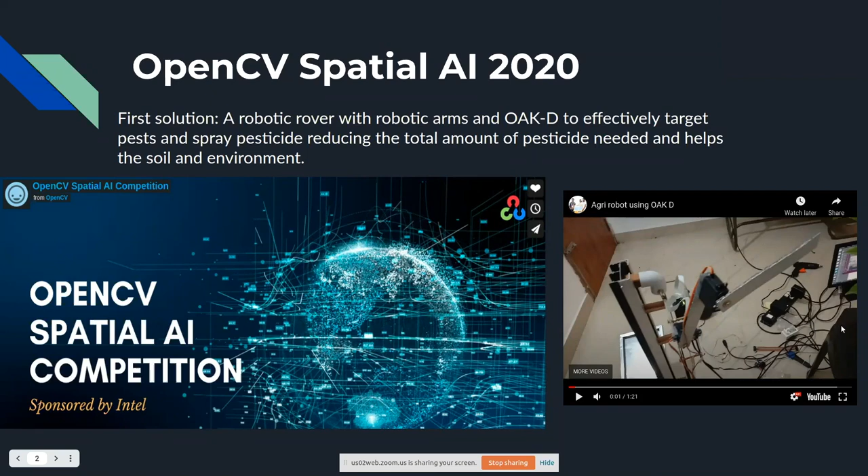You can say it's version 0.5, and it's basically a rover. That's the design part I've shown here, a simple proof of concept of what exactly we are trying to achieve. And moving to the next is what we are presenting here, moving from a rover to a quadruped. Big difference, it looks so cool now. Yeah, it's a huge difference.

You can see a lot of things happening there. There's a robotic arm, a small tank, and a small DC motor on the left side, and the OAK-D on the front side. So a huge difference is happening here. Just to give people some background, you just graduated, right? You started this project in your final year of undergrad, so you've been learning this yourself during your curriculum.

Okay, so the story is somewhat like an adventure. We have a team of 4 people actually working on the backend side, and I'm trying to connect with them and get the most information from them. We also have a community called the Spot Micro AI community that helps us solve some of the greatest problems facing this kind of quadruped robots. So it's an international community, and we have some colleagues currently working on this system. It's like an adventure.

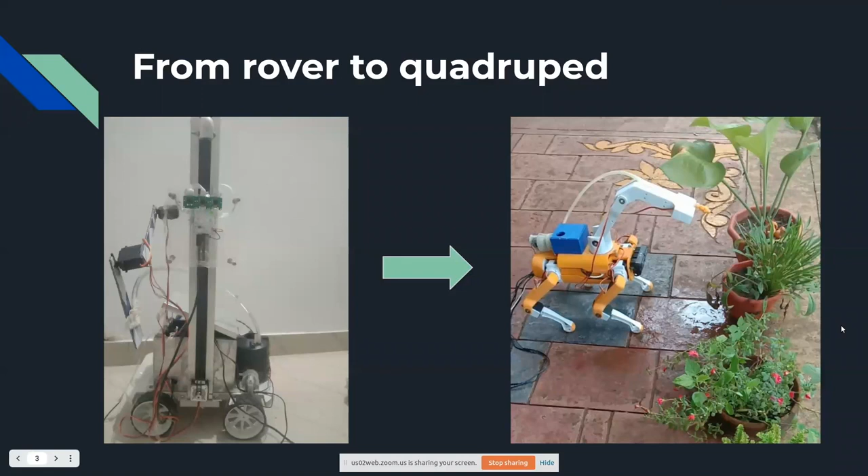Exactly, that's the problem we are trying to solve. The crop we're taking is cardamom plants, which is one of the most pesticide-spraying plants in the market. The problem with this terrain is that it's quite uneven. We actually visited some fields in our area and saw that the terrain is somewhat sophisticated. When you're integrating a rover system, you cannot push it further, even with a belt drive system. So the terrain is quite uneven, and a quadruped robot helps a lot. That's why we switched to a quadruped robot rather than a rover.

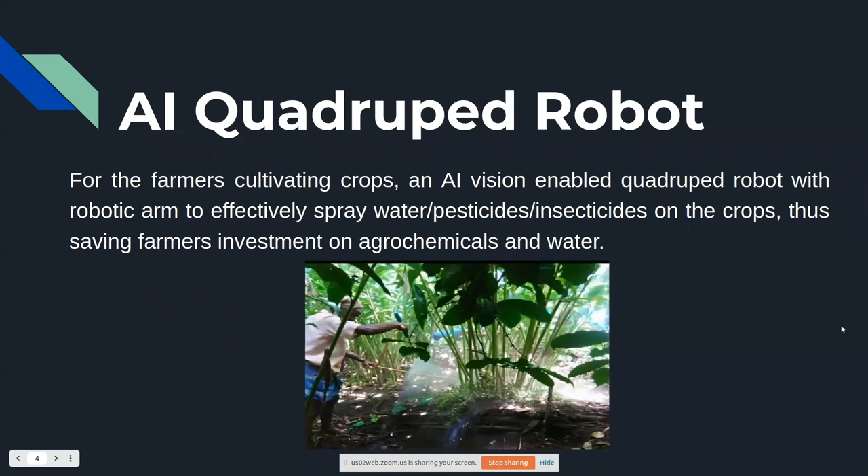Got it. As it progressed, we visited some farmers and found they have problems with agrochemical spraying, making a lot of expenditure on their side - about 70,000 rupees per acre. We chose this cardamom plant because if we can implement it on this highly sophisticated terrain, it's an easy task to implement on any agriculture field, like a vegetable field or a paddy field. Paddy field is quite sophisticated too, so that would need to switch to some other level of robots. A vegetable field is something we can implement after implementing on this cardamom plant.

And the problem is, just to give people an idea, since it's written in rupees - 70,000 rupees is essentially $1,000, and $1,000 is difficult to imagine when you have to convert it into cost of living terms. So would we say that for an engineer coming out of school, $1,000 a month would be a good salary for them? Nandikishore, is that right?

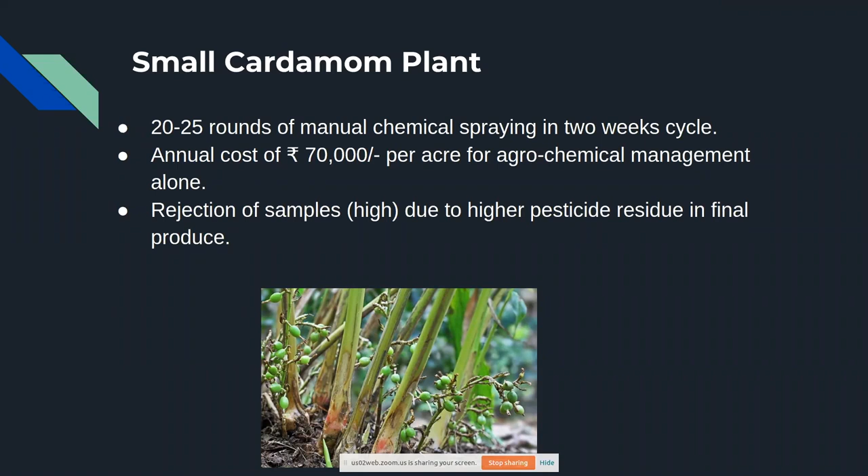Okay, right now we term this as version 1.0, which is actually a fully 3D printed version of Spot Micro. That's a fully open sourced Quadruped robot, and you can find the STL files on Thingiverse. You just go on the Thingiverse website, search for the Quadruped robot, and you can actually find exactly the same 3D printed designs or the STL files, and print it yourself.

But we actually changed a lot on the stability as we tested it to a lot of levels. Most of the times the leg breaks a lot, and it's like a disaster when we are testing this. So we needed to change it at some level, so that it can withstand some of the harsh environments that we are trying to test. So small changes happened during the progress.

So right now you can actually take the print from the Thingiverse, and make it at your home. It's not that complicated, you can actually do it.

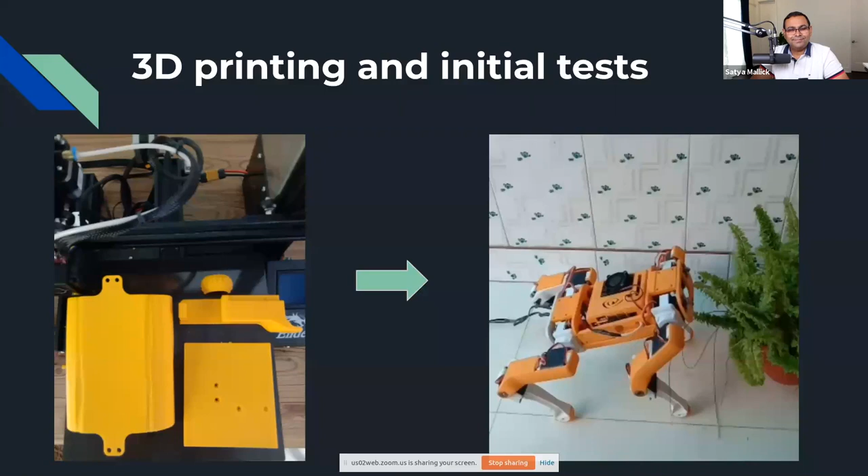Okay, yeah, that's exciting. Yeah. So let's move on to that. So most probably plenty of webinars happened on the OAK-D.

So I'm just explaining why I used OAK-D on my Quadruped robot, from a balance perspective and also from a vision perspective. Why I implemented it is that it has the XYZ axis, which is the only thing needed when we are doing balancing, and also along with that, in the arm you have to design your arm based on this OAK-D, provided by the community, or the Luxonis community. So the specification is shown here.

You can actually see it. It has 4 TOPS of visual processing, and it has a modular structure, and you can implement it on the arm shown before, or you can just put it on the front side or back side of your robot, integrated with the robotic operating system, to make the Quadruped robot more intelligent. So that's why I implemented OAK-D with it.

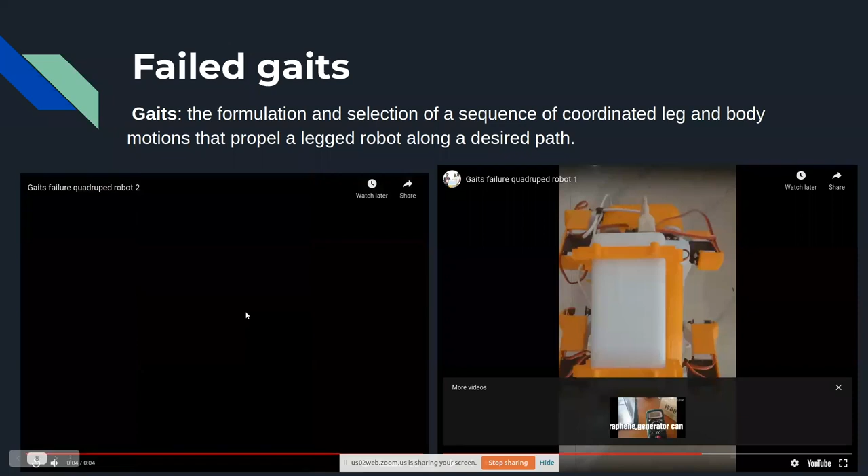So it actually fails, because if you look here, it's not moving in a synchronized way. The diagonals are not moving in sync. That's the problem that's happening. Same thing here - I'll put it on top for the camera. The synchronization is not there. That problem is called a failed gait.

The code and software that comes with the robot, does it not work out of the box, where you can just get it out and ask it to move? You have to code that gait yourself?

No, it's actually simple. You have to calibrate each of the legs - all the legs have to be calibrated to a certain angle, which is provided by the repo itself, where you can use your laptop or PC keyboard to move all the left and right legs - we have 4 legs here - to their angles. You have to note down the angles on the YML file that's in the SRC file of the Catkin folder. So you have to put the YML file there.

That's the calibrated file. What exactly happened is I worked on the same problem for almost 2 weeks, almost 3 weeks, but the problem happened because I didn't look at the pre-calibrated values provided by the repo.

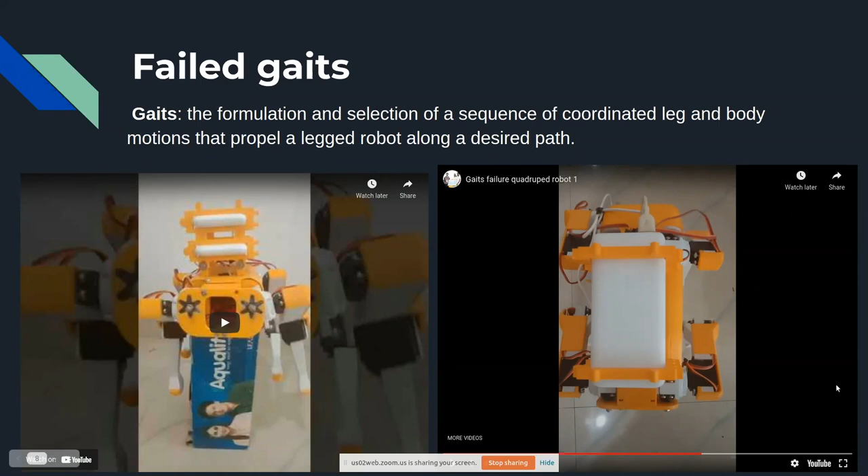Got it, okay, let's move on. Okay, let's step. Okay.

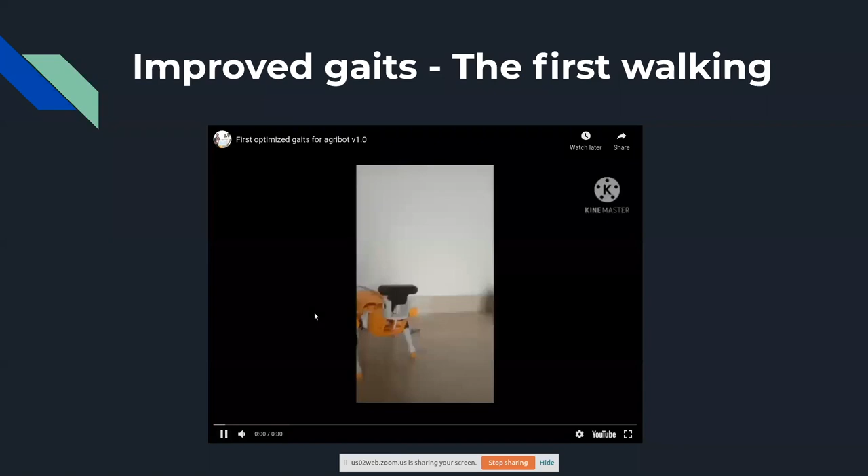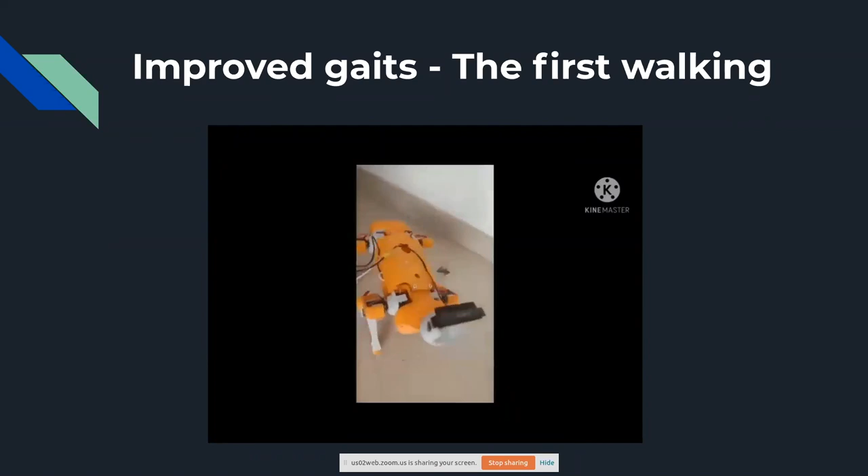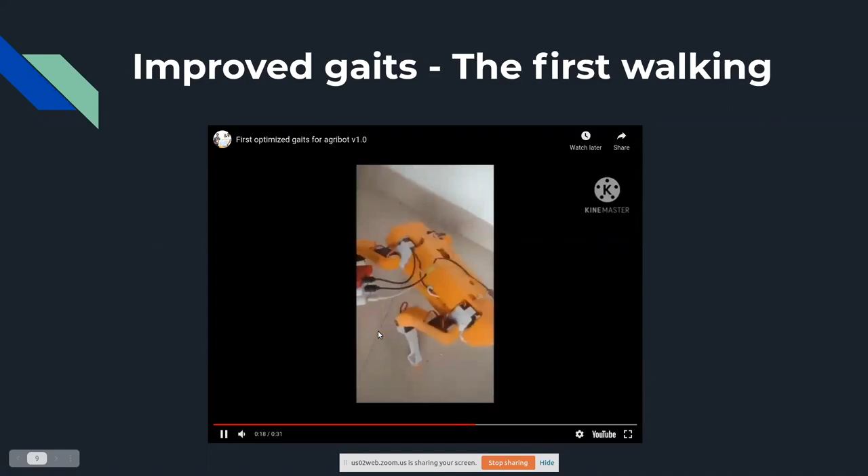Now it's actually improved a lot, but not so perfect. It moves, but has some problems - not moving so fast, like moving in a stationary way. It's not that fast right now, but it's improved a lot. You can see 3 power banks powering this one, and here are the optimized gaits. It's quite improved and runs a lot better than the previous one.

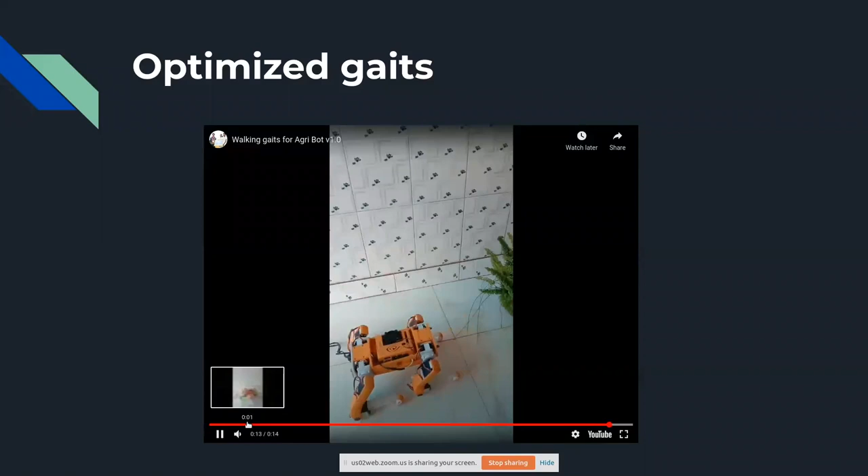That's the optimized one, and it's actually more optimized than the previous one. So right now it's much better.

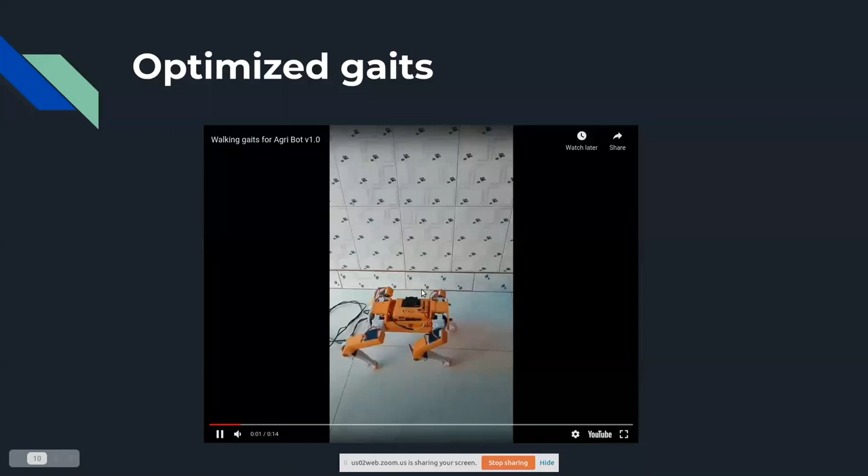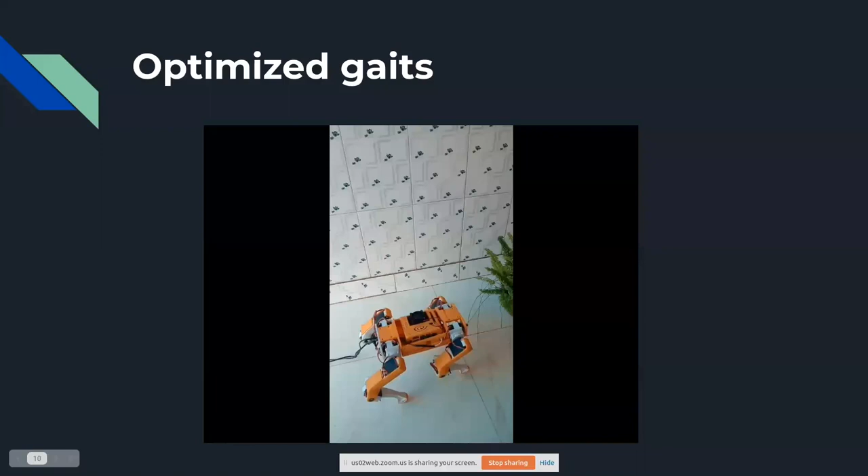So it's controlling from a keyboard, and the Jetson Nano is connected to a VNC. I'm actually virtually controlling it, since it's connected to the same Wi-Fi, so I can control it from my computer. So this is the optimized gait right now, much better than the previous one.

So this is actually what I've done. I disassembled everything. In the previous failed case, I had to disassemble every part down to its scratch and reassemble it, and when you're reassembling, you have to calibrate. That made a lot of improvement. It's like an optimization problem, you have to find the exact sweet spot to make it work.

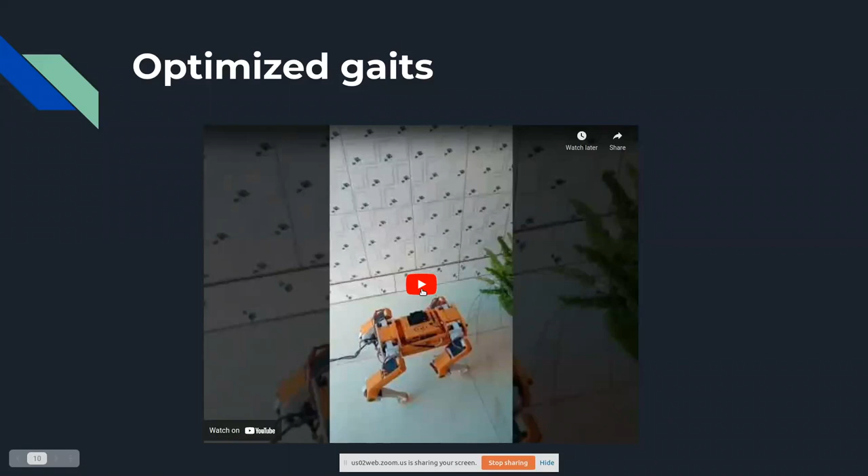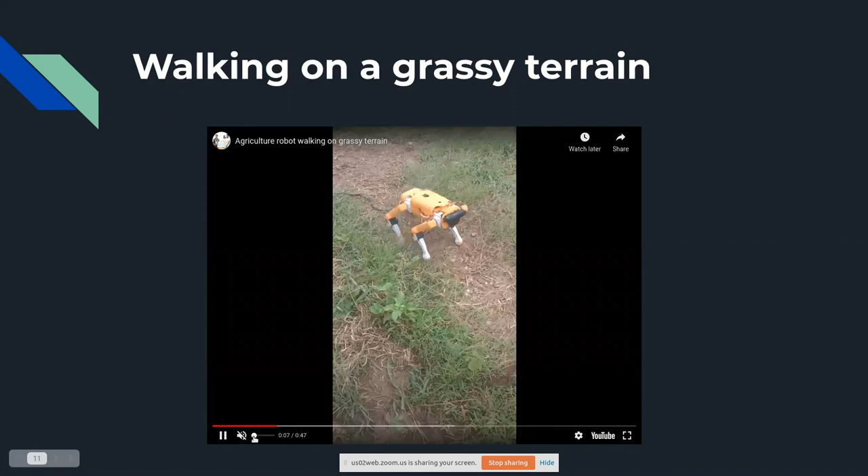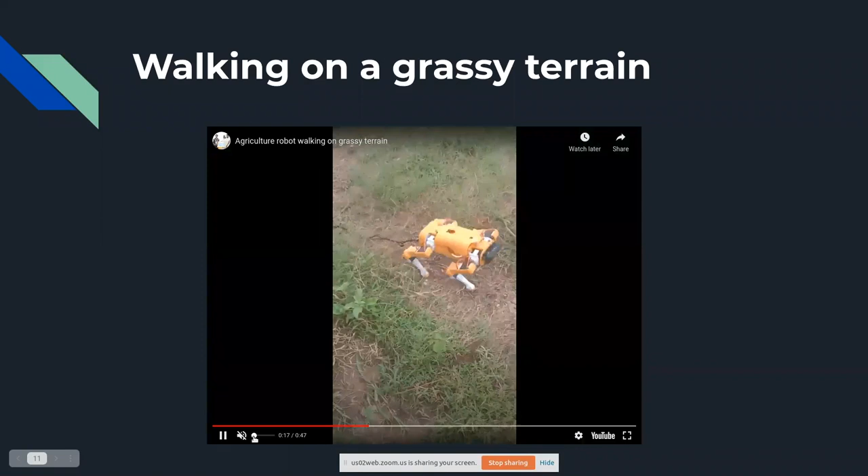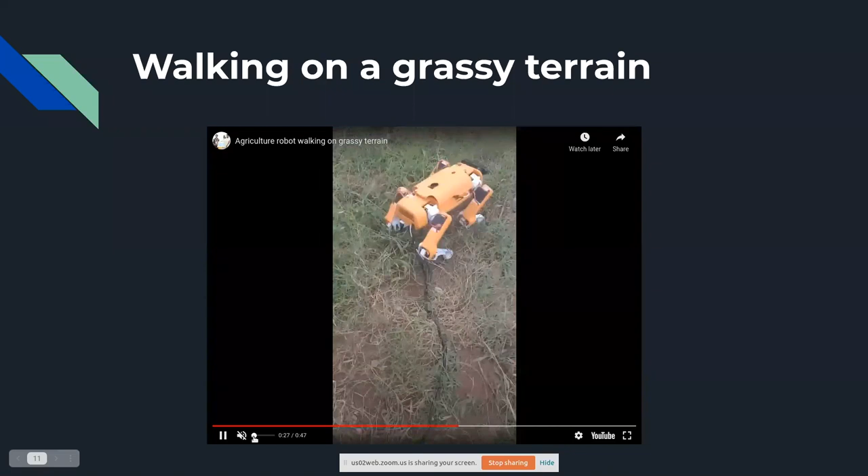And the next one is actually the most interesting one, where I put that on a grassy environment. That's the terrain we will definitely implement. It took a lot of time when it was moving on this kind of terrain, but it's the most successful experiment that I've done so far on the walking gait.

So right now you can see the camera is from a Raspberry Pi Zero W, not from the Jetson Nano. I don't actually connect the Jetson Nano to it, because it takes a lot of power out of it, so when you're connecting it, everything stops working. I need to connect it to an external power supply, so right now it's actually connected with a Raspberry Pi Zero W.

That's a small Raspberry Pi, and the visuals that are seen are actually from the Pi Zero W. It's quite fascinating when it works on the field, so satisfying to see it on the field itself.

Yes, that's absolutely true. What about the camera, does it provide any feedback on the motion? Can it actually improve the motion of the robot based on depth analysis, etc.? Can it look at the terrain and say this is the next motion, or how you should move next? Is that something you do or plan to do in the future?

Yeah, that's the thing I'm actually planning to do, and trying to achieve right now. The idea is you're getting the exact location values, the XYZ value, which is the distance between the object. That's the value we want, and from these values we can either stop the bot. Say if the crop is around 2 meters or 1 meter distance from the bot itself, you get the value 1 meter, so you give the bot a command.

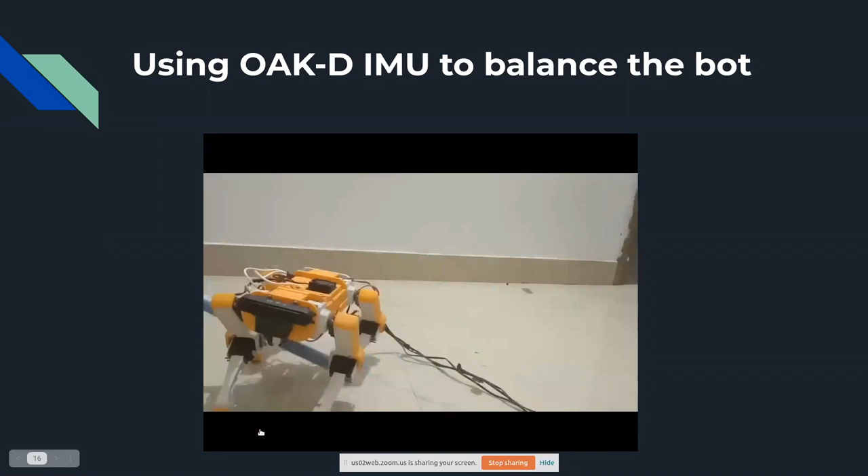The better one is actually, right now it's a hard-coded program. The better solution is actually PID controllers, where you can find the best solution out of it. I'm trying to do the PID controller right now, but it's not so responsive yet, though it does work. So if you see here, it actually changes its orientation to adjust the situation.

That's the idea, using the quaternion angles from the camera. So this is right now the actual feedback getting from the camera, integrated with ROS, which is the core powering the motion of the robot. And this feedback has been fed to the bot.

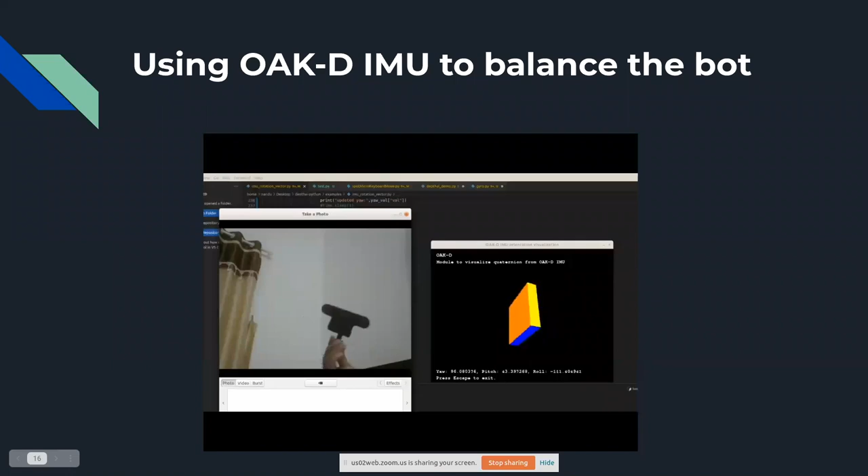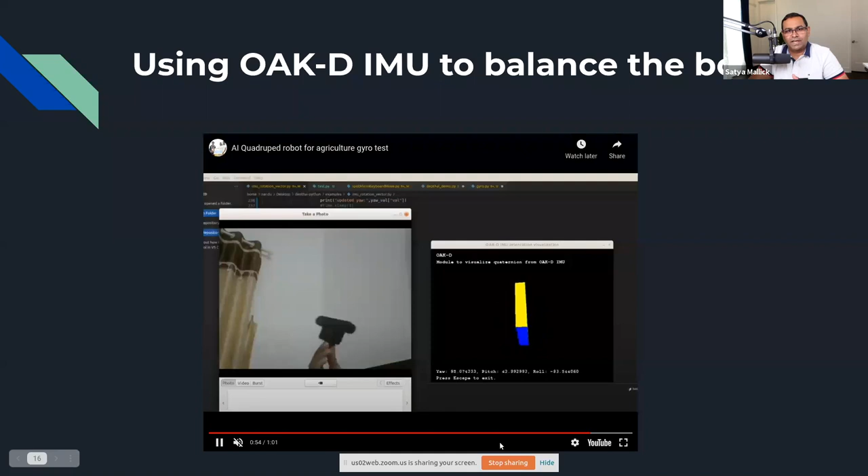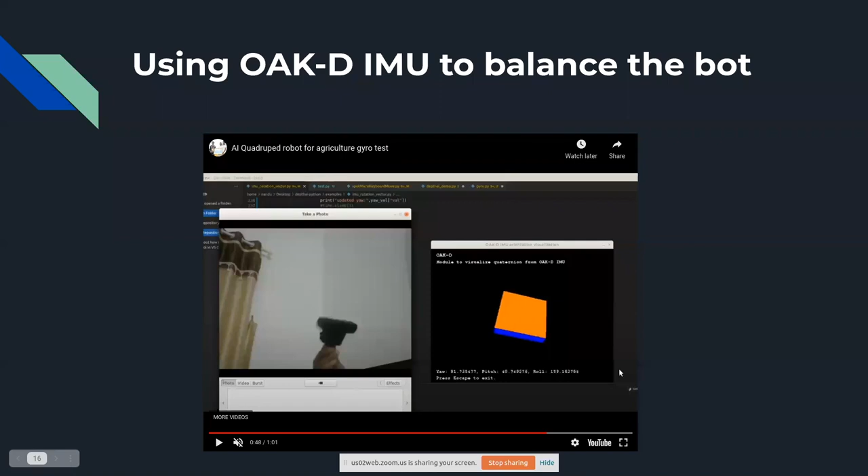So what you're looking at is OpenCV AI kit with depth. That's the video on the left. And it has an IMU, which gives you the orientation of the camera. On the right, you're looking at the output of the orientation as measured by the sensor. Is that correct, Kishore? Yeah, exactly. It has the gyro and accelerometer values, and we're taking the gyro values out of it, mapping them onto a visualization function provided by a Python library, and it just shows the gyro values. That's it.

Your original slides. Yeah.

So the next one is actually the robotic arm part. There's a lot of challenges happening here. It's an engineering problem. Either you have to put the camera on the board end or on the front side of the bot. The actual solution requires implementing on both sides. You have to put one camera on the arm and one camera on the bot itself. The idea is you have to get the location of your arm and adjust the bot according to the robotic arm, and also adjust the robotic arm according to the quadruped robot's position.

So it's like there are two OAK-Ds on this bot. Is that right? Yeah, but actually we haven't integrated the OAK-D on the arm yet because it needs to be adjusted—the size of the OAK-D is quite a bit bigger, and the center of gravity is causing some problems. So the physics is actually the problem right now. We're trying to achieve both, but right now it's only on the right side, just on the bot. Okay, so on the bot, almost like the eyes for the bot. Exactly, that's right.

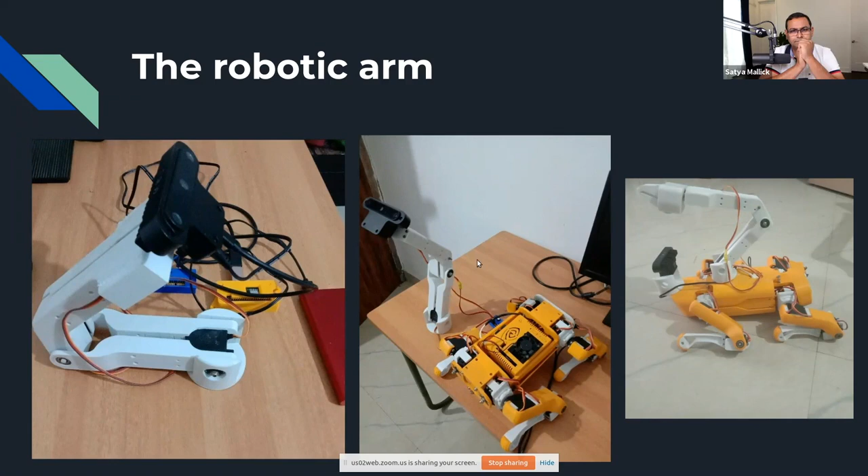Let's move on to that. So basically the first idea is without the sprayer system. This is what we're trying to achieve—the experiment we've done by detecting the crop, or say a potted plant, using the provided COCO model from the TensorFlow community. You make it into a blob model, a blob file, for working on the OAK-D. So you get the location of the potted plant, set the commands for how much it should be rotated, and put the end of the arm over there. So this is the first experiment we've done without the sprayer system.

Okay, so here it looks at all the potted plants, and once it locates a potted plant, it walks to it, and that neural inference—the determination that this is a potted plant—is being done on the OAK-D. Is that correct? Exactly, that's right. And then it walks to the potted plant—does it walk autonomously, or is it through the keyboard? It's right now completely manual, but the motion itself is autonomous.

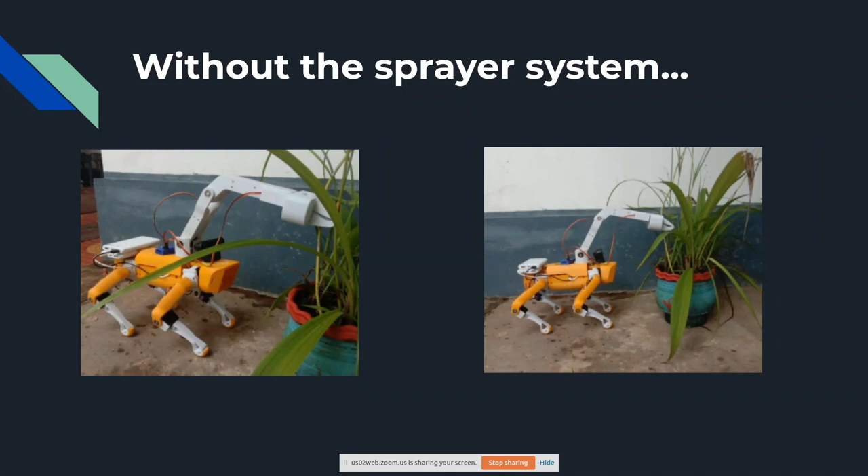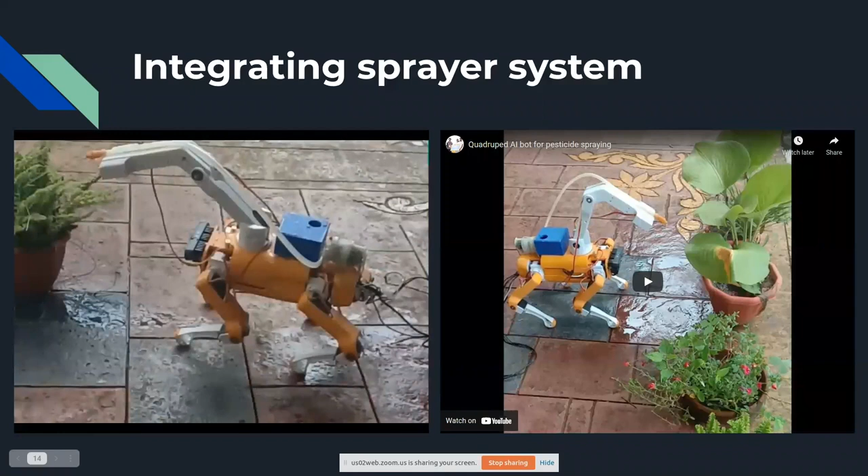And so right now you can see, as Satya explained, how it actually moves and sprays. All right, so it's actually integrating the sprayer system over it. Always dangerous and interesting when you have electronics and water.

Exactly, that's the problem, that's the risk I have taken. It's months of work, but it can be destroyed in seconds if water falls on the Jetson Nano. It'll be a disaster, you have to start everything from beginning. So it's taking a lot of risk when water is over there.

So here you can see how it actually sprayed. So it detects the plant.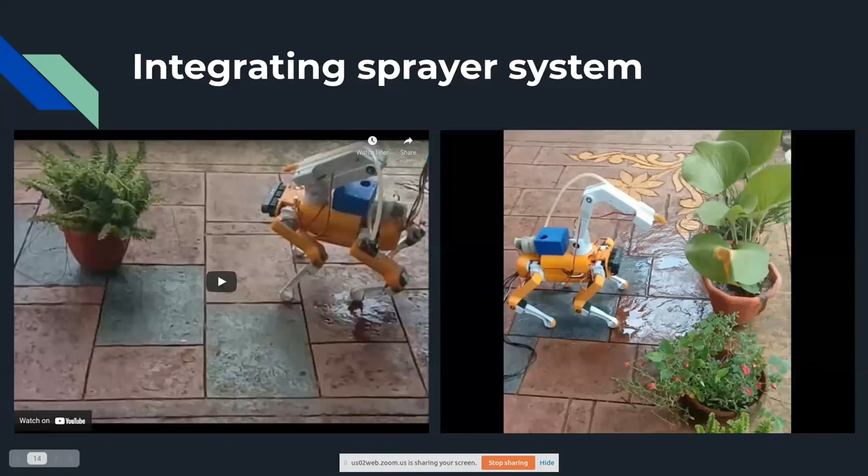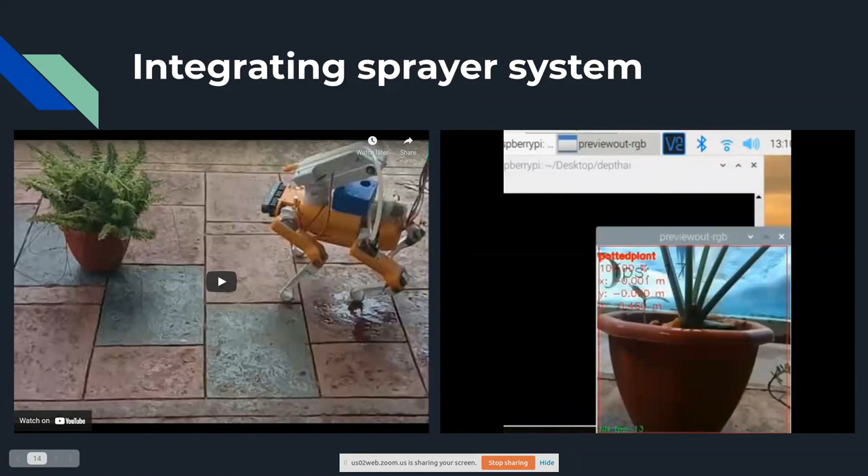Right now it's using the Raspberry Pi Zero W, and the OAK-D is not attached to the Jetson, it's actually attached to the Raspberry. The Raspberry is the one that controls the robotic arm and the DC motor, that's the pump. That's the interesting part, we actually don't use the Jetson to do that. So that's the sprayer system for you.

Okay, now let's move to the next slide.

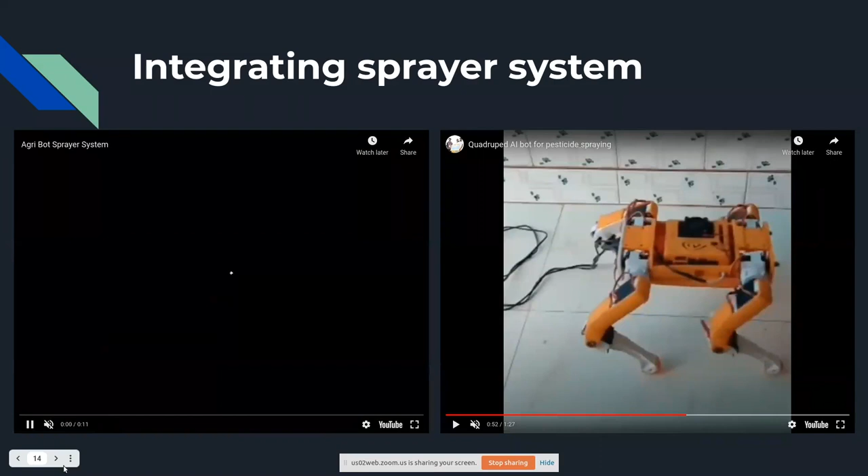It's like 46 centimeters, that's the distance, that's the x-axis value, and you can take the OAK-D value here, x or y, you can take both if you want. That doesn't make much difference, and using simple trigonometry you can calculate the angle, the angle that should be rotated. The servo should rotate that angle to reach that exact point.

So the idea is when it detects the potted plant, is it trying to make the roots at the center, and then trying to spray not on the root, right? It has to spray on the leaf. Yes, or the roots, but it actually sprays on the leaf itself.

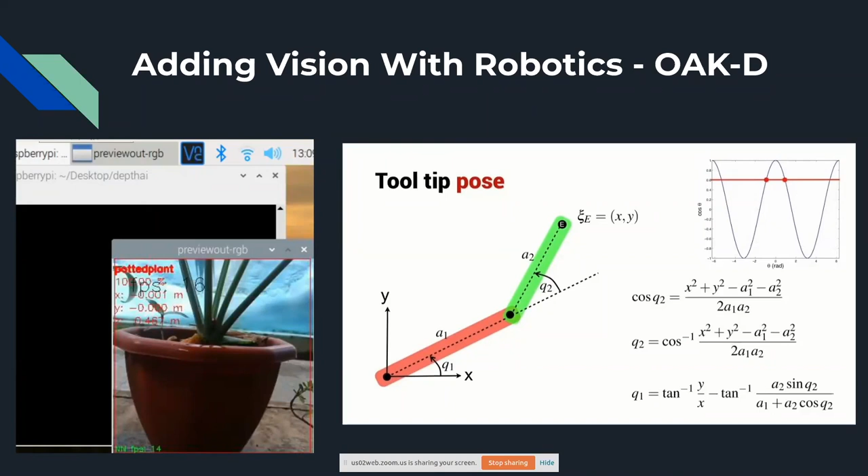Okay, great. So for the experiment, I've just shown it as on the surface. Okay, so it's already shown here, I have explained that part.

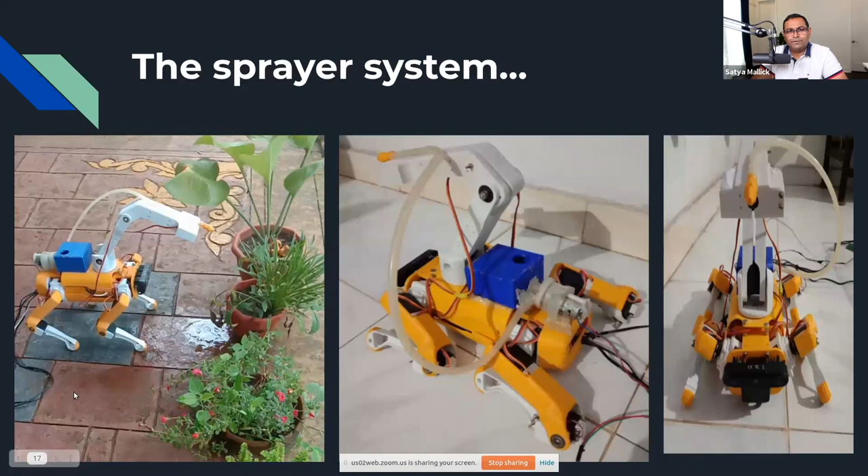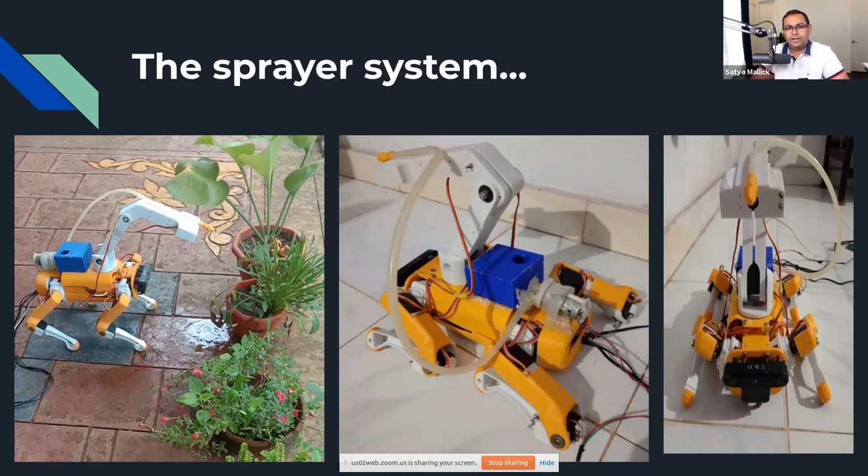So you're using 3 parts of OAK, right? First the neural inference to detect where the plant is, and also depth estimates to focus the tooltip, where to spray. For your inverse kinematic stuff you're using depth from OAK-D. And the final thing is you're also using the IMU for stability on OAK-D, is that fair to say? Yes, exactly, that's the overall system right there.

So here you have the DC motor that's powering the tank right now, and when it reaches the destination it sends the command to the Raspberry Pi Zero W to start the motor and spray for around 2 seconds, stop it right there, and retract the arm to the initial position. Right, so that's the simple logic that has been implemented.

And in the future, the disease, the pest, the original idea where you're actually detecting whether there's some pest infection or not, right? That's easy, that's an easy task. But as we analyzed the situation and talked with agriculture experts, pest identification is actually not that efficient, because sometimes pests happen on the bottom side of the plant or on the leaves, and it's so small that you cannot do it.

The resolution is quite small, and SSD MobileNet cannot do it, even if it has the feature pyramid network. Even with that, you cannot identify the small pests. So the idea is actually to just use the leaves to spray, to identify the leaves and spray on the leaves. That may kill the pest. So you exactly spray how much amount you want on the leaves itself. So targeting the pest is not a good option.

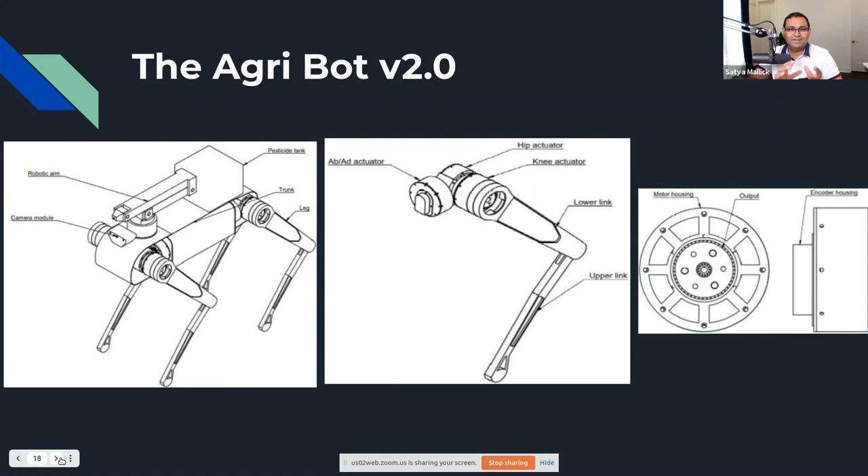Got it. Keep in mind, on this webinar we have a very large range of solutions. On one end, we have people competing in the OpenCV AI competition, who spent about 3 to 4 months to build this thing, which is quite phenomenal considering so many things can go wrong in hardware. On the other end, we also see people who've spent years, like the robotic companies we had on the OpenCV webinar recently - they spent years developing their robotic solution. I think Scythe had been 2-3 years by then. So we have to keep things in perspective that this was built in about 3 to 4 months, under extreme circumstances with the global ongoing pandemic and shipping catastrophes.

Yeah, that's right. And so you're planning to make this open source, right? The second version we cannot do because it goes to the industry. So the first version, we will open source, and we're gathering every resource we have right now to make it completely robust and fully documented. Version 1.0 will be open source, version 2.0 is not yet open source, but you can find the exact design on the internet if you search for a bit. There's also a Discord community to help design it, if you're passionate about it.

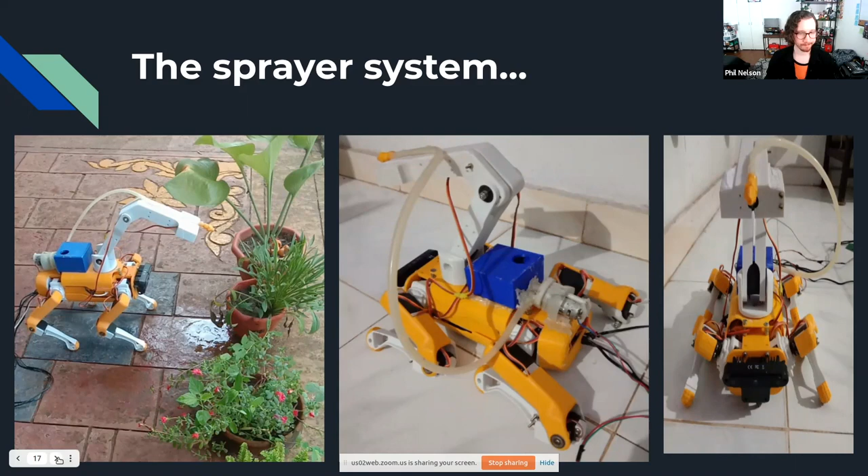Got it. Cool. This actually happened today - some of our people visited the cardamom plantation, and you can see the terrain that I explained. It's so sophisticated that things go pretty wrong when implementing the bot. The physics is the problem we're facing right now - the friction, the wind, the slope, everything. That's the toughest task to implement on this kind of terrain.

Yes, exactly, physics causes nothing but problems. So this happened today - some of our colleagues on the operations wing visited a farmer called PB Anish. He's an awarded farmer, recognized by the Kerala government in the best agriculture category. He has around 6 acres of farmland, ranging from cardamom plantation, nutmeg, pepper, coffee, dairy, hens, etc.

So we got a lot of information out of it, how we can actually implement. And he's so excited about the Quadruped robot. He's saying it's going to revolutionize his field. So he's a techie farmer, and he's also trying to achieve implement drones also. So that's future. He's quite interested in our Agri-bot. So from a farmer perspective, there's a huge demand to use this robot on the field itself. So we have a testing environment right now ready to do it.